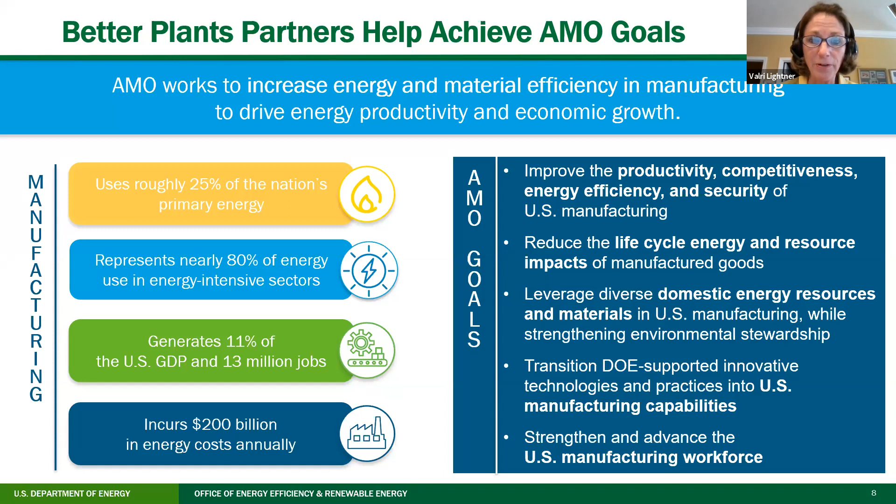In our next slides, I'm going to focus on some of the recent work we've been focused on in AMO and give you some examples of ways you can engage in partnerships with us. With COVID on everyone's mind, I thought I'd share examples of work the national labs are doing, taking advantage of partnerships they've developed with industry through programs like AMO, and using that relationship to assist industry in rapidly changing their manufacturing to make needed items. In this case, it's medical supplies that have been in short supply as COVID ramped up, particularly masks, ventilators, and consumables.

Taking advantage of capabilities at the Manufacturing Demonstration Facility, which focuses on additive manufacturing, Oak Ridge has used their metal manufacturing capability to make injection molding tooling for parts such as collection tubes for test kits. They've shared the designs for the injection molding tooling on an open source platform, particularly with companies they're already working with, but also wanted to make it available to any company with injection molding capabilities so they could help support making needed test kit supplies such as test tubes.

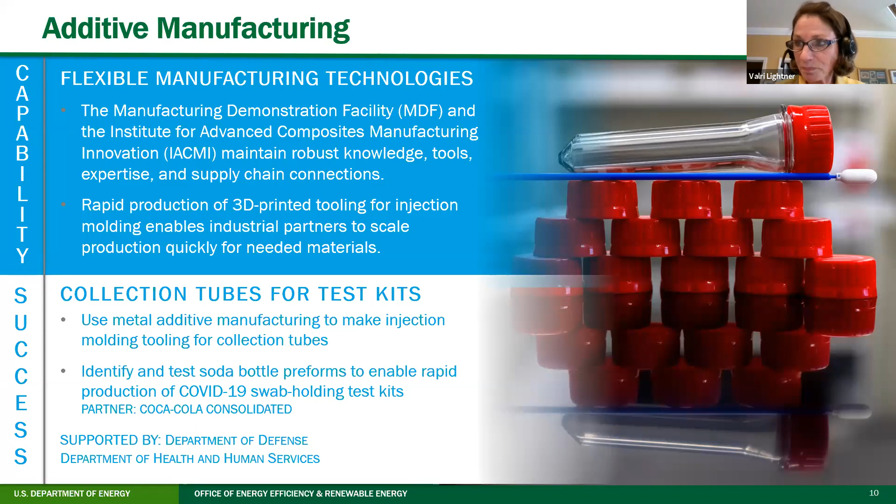Another example of work we're doing with industry for COVID relates to our Carbon Fiber Technology Facility. Here's an interesting story: the inventor of the N95 mask recently retired from the University of Tennessee, and he partnered with the CFTF to develop a melt-blown process to make N95 materials. First it's melt blown, and then there's an electrostatic charging process that occurs to make the material active in preventing transmission of the virus.

Oak Ridge has been working with him and partnered with Cummins to transition this technology to Cummins, who has melt blowing capabilities and can produce millions of pounds of the N95 material. Again, they're open sourcing the technology and looking to partner with other companies that also have melt blown capabilities that can make N95 materials.

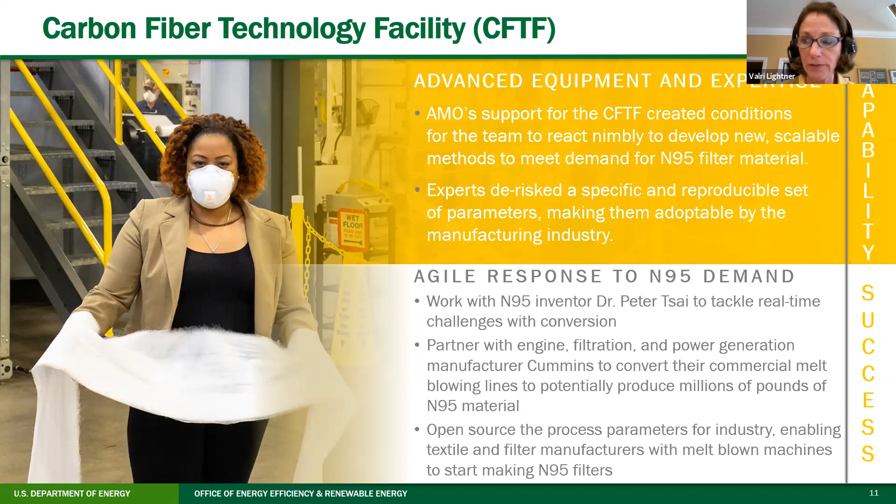In the past year or so, the Department of Energy has announced 3 grand challenges: one related to energy storage, one on plastics innovation, and one on water security. The Advanced Manufacturing Office is working in all these areas. In the energy storage area, there have been remote workshops like the one we're having now over the last month or two, gathering information from stakeholders to inform a draft roadmap that'll be issued later this summer. Along with the roadmap, there will also be a request for information, so for folks who weren't able to join the webinars, there's an opportunity to weigh in on where you feel the right federal role is for energy storage.

AMO has been partnering with the Vehicle Technologies program. Last year we had a topic in our funding opportunity to use battery manufacturing to help drive down the cost of battery energy storage materials and systems for vehicle applications. Just a couple weeks ago, we released a joint lab call with Vehicle Technologies, looking for industry to partner with the national labs through CRADAs to use national lab capabilities to help scale some of their energy storage systems. Look for additional information coming out about how you might partner with the national labs on that. Applications are due July 17th.

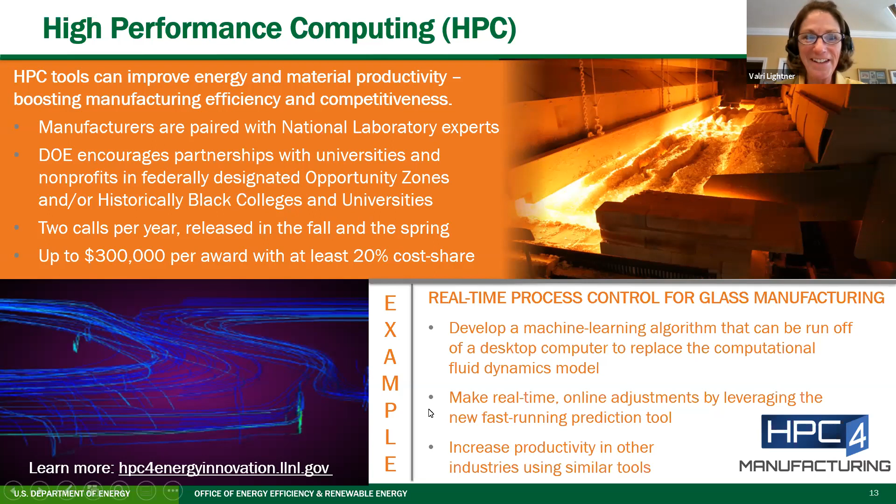So this is just one example of how industry has used that capability to optimize their process. Next slide. I just wanted to throw up a few of these examples to encourage you to continue to work with Eli and the team to explore some of these opportunities to expand your partnership with the Advanced Manufacturing Office.

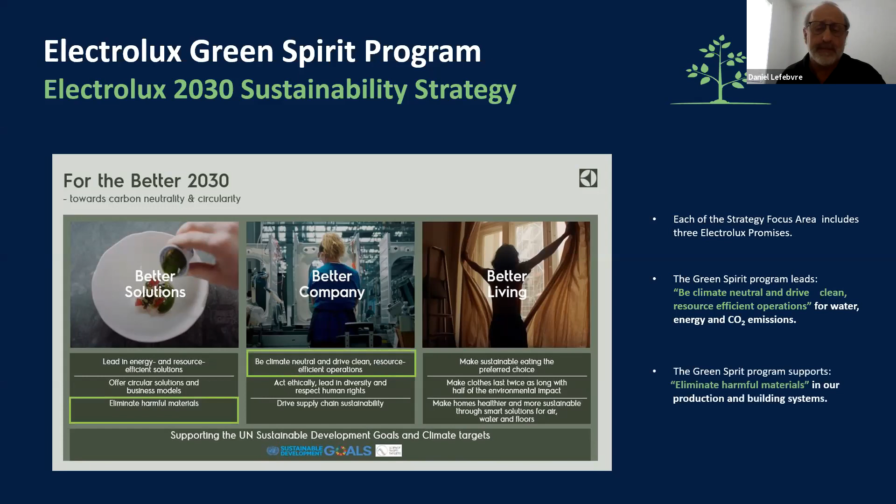I will let Mike, our manufacturing engineering director of our Kinston, North Carolina dishwasher facility, explain this water treatment solution. Thanks again to DOE. Again, my name is Mike Brown. I'm the manufacturing engineering manager for Electrolux Home Products, Kinston, North Carolina dishwasher facility.

Our project involved the implementation of sphagnum moss that took the place of the hazardous chemicals historically used in treating process water, such as cooling towers, chilling water loops, and quench tanks.

The specific species of sphagnum moss used in this system promotes the breakdown of scale and other contaminants, and it has special properties that enable this to happen. It gives us better results with better operating efficiencies. So it's better, and it's also a very environmentally favorable solution. If you look at the bottom left picture, you'll see the moss is provided or created in either bags or coupons.

One of the challenges the team worked on is providing sufficient contact time between the moss and the process water for it to do its work. We went through all the operations in the factory and are now 100% converted over to moss, and we have sustained it since 2017.

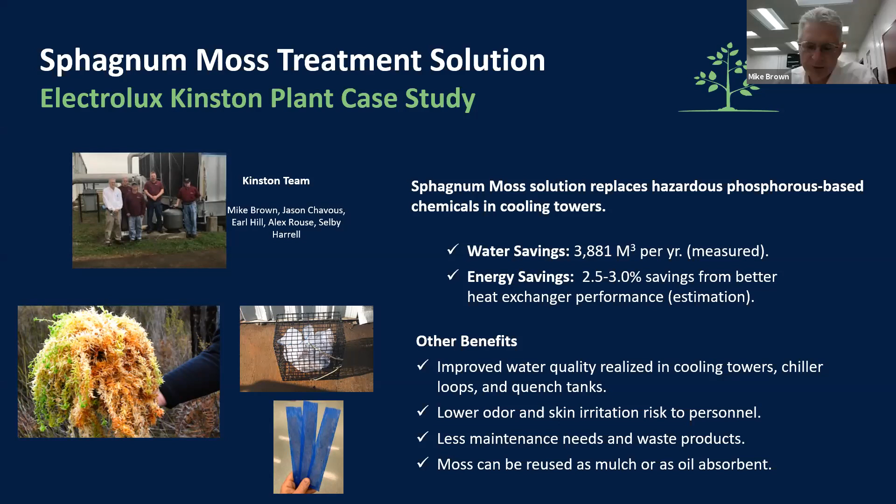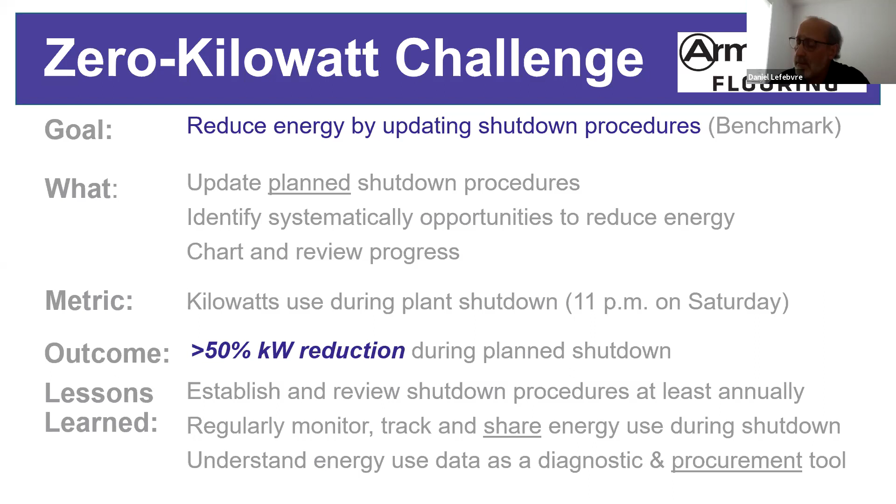So we started off with some really simple, easy changes to their shutdown procedures, things as simple as including in our shutdown procedures a map of where the light switches were located, so anybody new to the company would know how and where to turn off our lights. We progressed into adding sensors so that the lights would go on and off automatically, so that was not an issue.

But the real effort where we got one of the biggest impacts was really analyzing the equipment that was running in the plant during our planned shutdown procedures, and trying to determine how we could turn off the pieces of equipment that were running on the weekends and during the planned shutdown.

For example, we had our compressors. We were running our compressors at our Lancaster, Pennsylvania plant, which is the plant we started our challenge with. We were running them over the weekends because we had to maintain the fire suppression system. But what we realized is we didn't need to run both compressors to maintain the fire suppression system, so we were able to bring down one compressor and still run the fire suppression system with the other.

Our maintenance manager was able to look at how much energy we were using at the plant. We used our demand management system, so it's real-time data. He could go in, turn off equipment, look at our demand management online system, and see how that was impacting our energy. That really led to our key performance metric: kilowatts used during plant shutdown.

So we basically looked at how many kilowatts we were using at 11 p.m. on a Saturday when the plant was shut down. We did this before we started studying and making changes to our shutdown procedures, and then we did this again after we made changes.

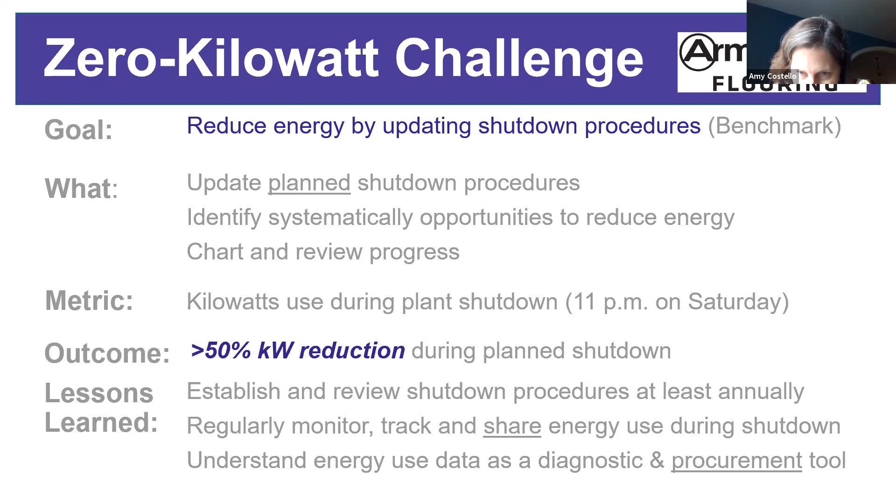Next, I'd like to present Ford Motor Company's Jeff White, who is the Energy Manager for Global Utility Supply and Efficiency. Ford Motor won a Better Project Award for redesigning their plant and including CHP in the new plant's redesign. There's also a lot of other innovative things, and I'll let Jeff go ahead and tell us all about it. Go ahead, Jeff. Thank you to the DOE team for hosting this conference and inviting me to speak on Ford's behalf about this new central energy plant.

The who, what, when, where, why, and how of this project is a remarkable story of vision, collaboration, and cooperation to deliver a state-of-the-art energy center that will function as the heartbeat of Ford's research and engineering center in Dearborn, Michigan.

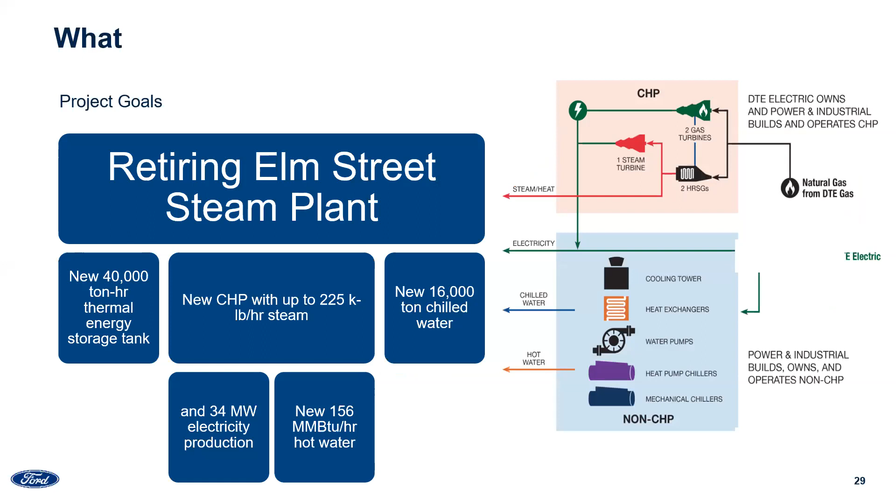For those of you who don't know, the Ford campus is in Michigan. All of the necessary utilities to heat, cool, and power the new campus were considered in the development of this project. We said goodbye to the old Albert Kahn designed steam plant to welcome the addition of a new modern central plant.

The project began in 2016 and concluded with the certificate of occupancy and commencement of commercial operations on December 31st of 2019.

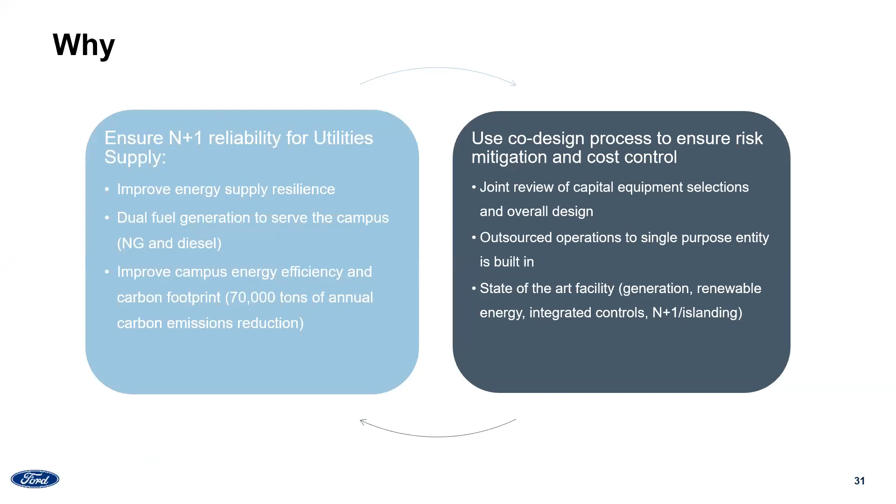N+1 utility resilience and environmental impact of this facility were 2 of the key design requirements that drove a recursive co-design process intended to ensure risk mitigation and cost controls. There were many questions as to how this project would come together, and this slide represents a sample of how those questions drove the thought process, the selection of partners, and the ultimate design as an ahead-of-the-meter facility.

The contractual relationships that were developed between private, regulated, and non-regulated entities is unique and serves as a model for how this country can solve regional and local utility infrastructure needs and improvements.

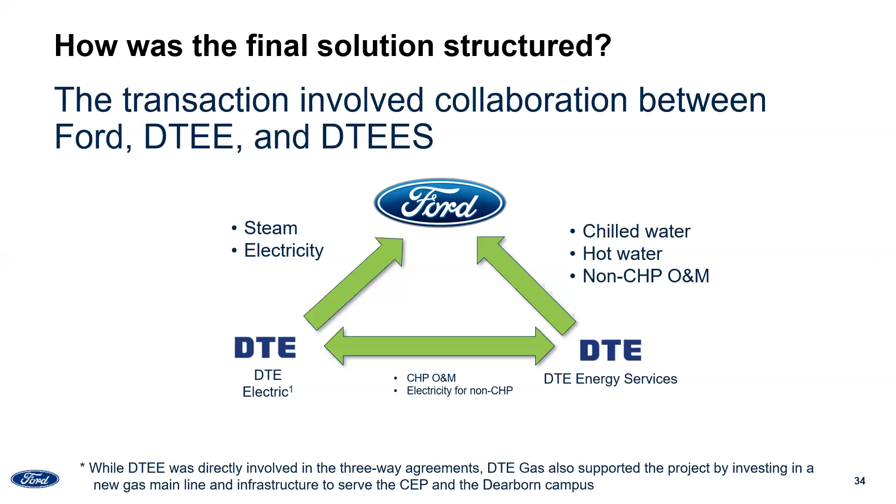For example, the regulated utility owns the gas turbines and heat recovery boilers. The output of those assets are sold to Ford at tariff rates. The balance of plant and the building itself are owned and operated by the unregulated affiliate. The output of those assets are owned by Ford, and the ownership of the assets themselves transfer to Ford at the end of term.

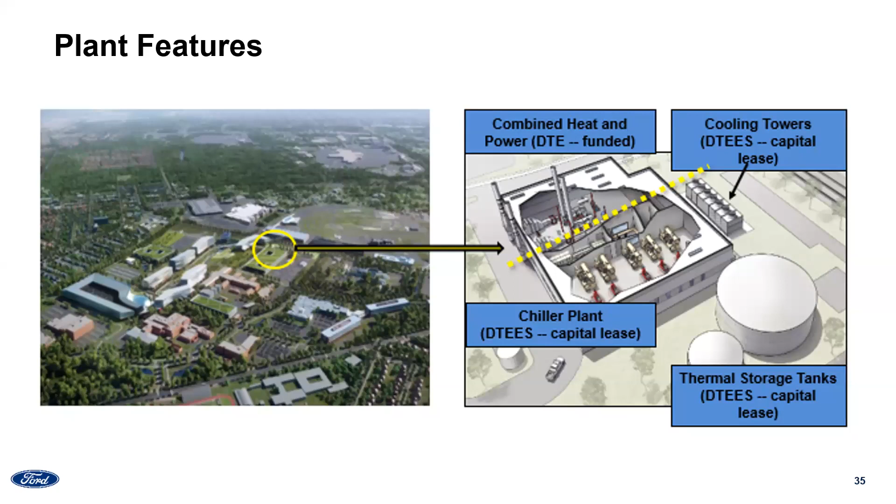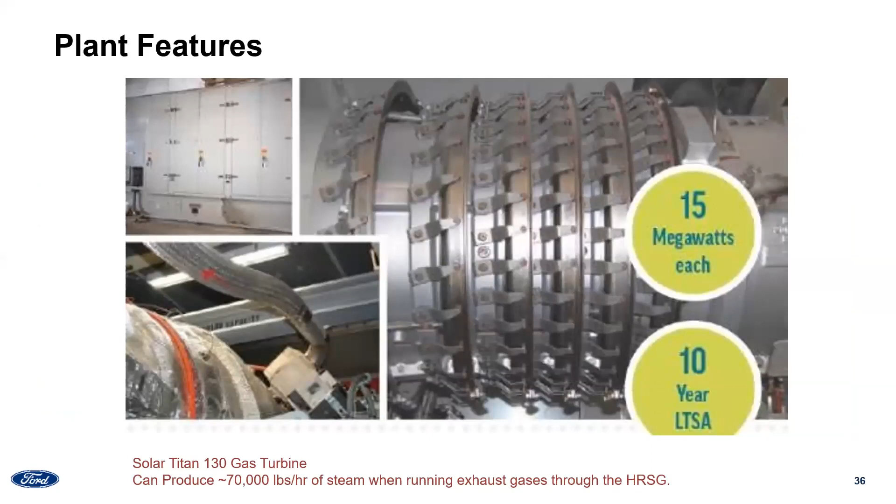I've included some pictures of key systems, but six minutes is woefully inadequate to cover the amazing team effort that went into the design, construction, and commissioning of this facility. While scrolling through the remaining pictures, I will talk about the digital twin aspects of this project.

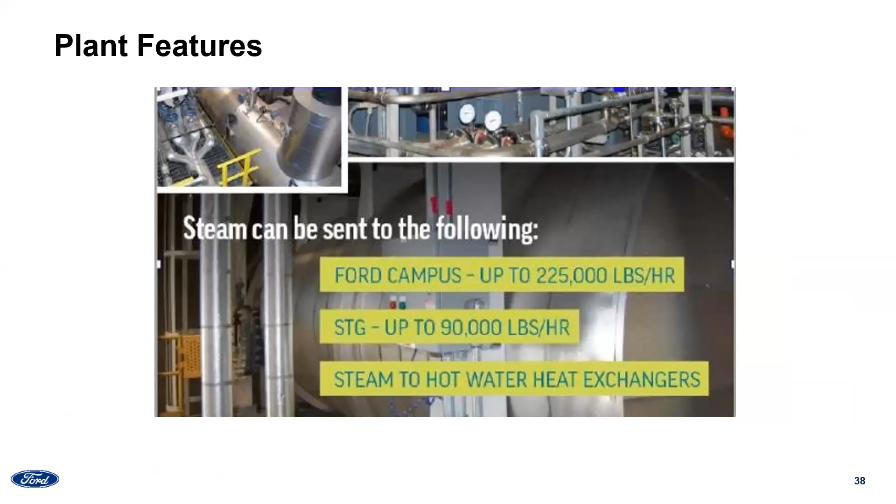The entire project was developed as a 3D model. The model dictated where every pipe hanger, every fire suppression head, every conduit, cable tray, and pipe should be located in 3D space.

Technology was used to mark precisely where each and every pipe hanger should be located. Each one was installed before any pipe was delivered to the site.

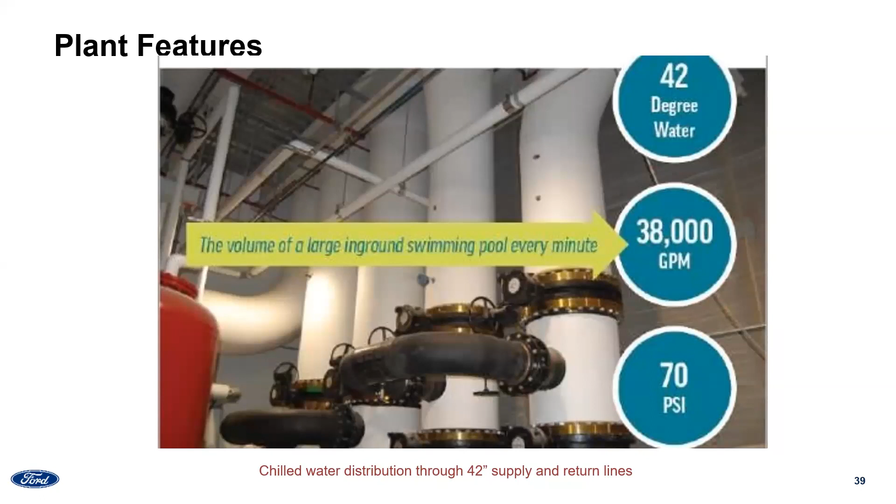The pipes were numbered and lifted into place, and then technology was used to validate the actual installation and ensure alignment with the 3D model.

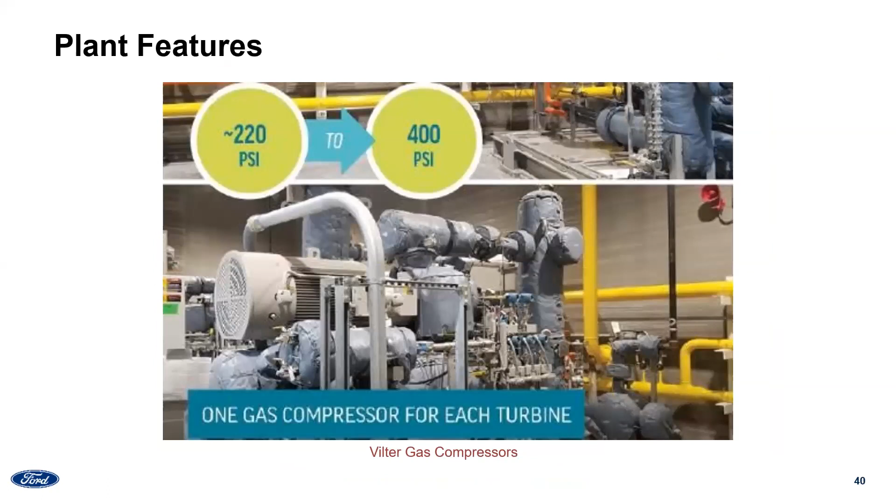Systems such as the thermal storage tank were used to model stratification design for the chilled water supply and return to the campus.

Pipe fitters had several on-site computer displays to reference the 3D model as needed.

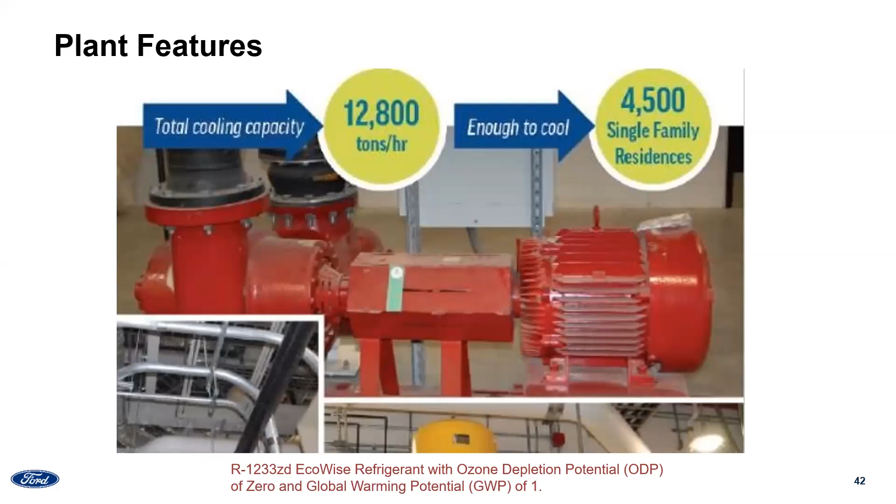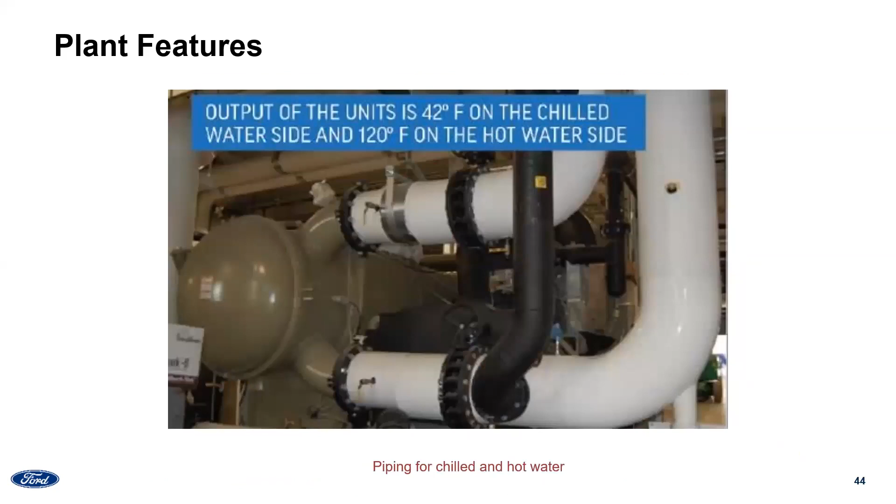The 3D model was then further enhanced into a digital twin that contained specifications and operating parameters on over 3,500 distinct operating assets.

Handheld devices and augmented reality capabilities will leverage the 3D functional capability of the digital twin to validate operations and establish preventative maintenance requirements.

There are many unique design features of this facility, including the ability to incorporate future planned geothermal capacity. Everything from a central plant perspective is integrated to include up to 3,000 tons.

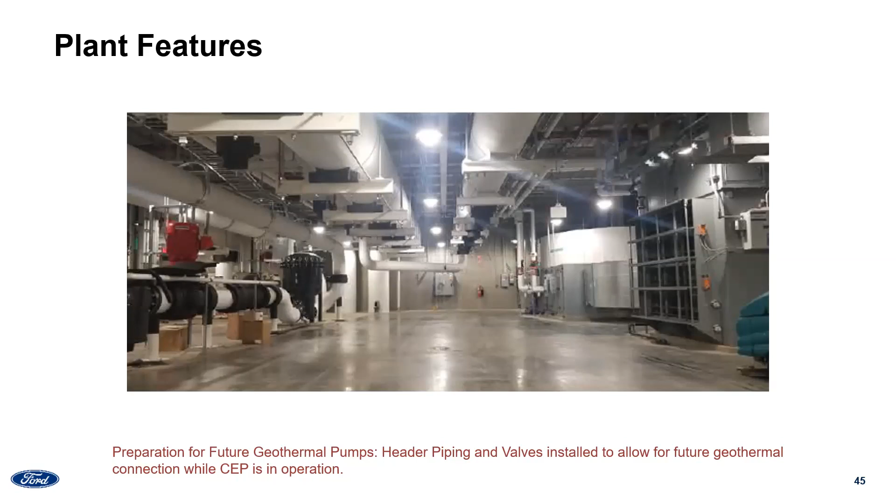Next slide. And next slide. And next slide.

Overall, this was a stellar project that I was privileged to be involved with. The vision and goals set back in 2016 were achieved due to amazing efforts of so many people working together to turn an idea into an unbelievable end product.

I could use my entire allotted time saying thanks to those people. Likewise, there are many innovative aspects of this project left untouched with this presentation, and I'm sure those discussions will come at some future date. Thank you for your time.

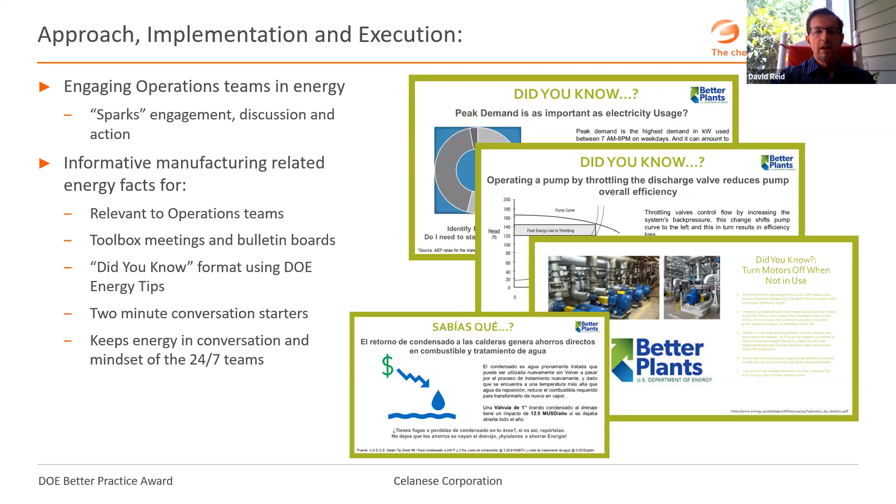The Energy Sparks can be shared at shift toolbox meetings at the beginning of shifts, or displayed on bulletin boards, including electronic bulletin boards, across the plants. Our shift supervisors at Celanese are always looking for topics to cover with their teams to generate engagement, and Energy Sparks give them that tool to get their team thinking and motivated about saving energy.

The Sparks are really only a part of an overall energy management strategy, and they contribute indirectly to energy reduction by driving engagement to make that difference. But that difference is, in the end, what results in improved energy efficiency, use, and cost.

One example of how Energy Sparks made that difference: at one of our plants, an Energy Spark on steam traps was shared with the operations shift team. It talked about how to detect a failed trap, and was shared with shift operators at toolbox meetings. The site already had a maintenance program in place, with annual inspections of steam traps done by an external company.

But the operators, following up on what they learned, suggested doing some further checks. Only two weeks after the external steam trap inspections were done, an operator doing his own checks found a critical broken steam trap and was able to get it repaired almost immediately, saving about $7,000. That may not seem like a lot of money, but these small improvements add up, and most importantly, they engage the operators with a result they feel they contributed to.

So this is only one example of how Energy Sparks initiated conversation and action at the shift team level.

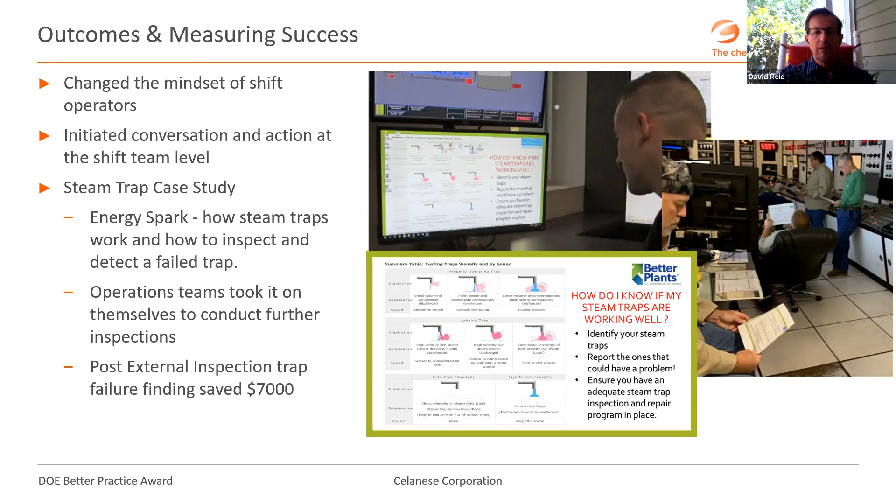Currently we have 16 Energy Sparks available in English and Spanish. Our goal is to do two things: translate them into other languages to ensure we connect with teams across Celanese's footprint, and continue to expand the number with new topics relevant to our operations teams.

A couple of important things: Energy Sparks can be adapted to any subject in the sustainability space, including water and waste, as well as any kind of safety and environmental subject.

I think this is really important as employees become more engaged in energy reduction at work, this mindset carries over to their home and community life as well. And this tool can be easily adapted to any company trying to engage employees in energy and sustainability efforts.

Companies can develop sparks that are relevant and specific to their business, ensuring that meaningful topics are covered that connect with their teams. So again, thank you to the Better Plants program for the recognition, and thank you everyone on the call for your attention.

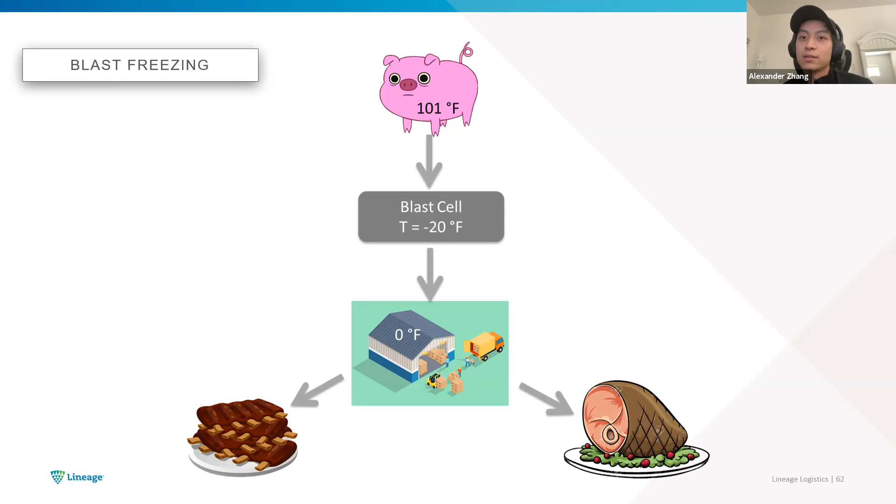So real quick, what is blast freezing? Usually we just store frozen food where the food is already frozen and people give it to us, and we keep it there for a duration before sending it off to the end user. But in the blast freezing process, we take food that is still at ambient temperatures, like freshly produced meat packed product, and we rapidly chill it in a room we call a blast cell, which is at -20 or lower Fahrenheit. We cool it as quickly as possible to maintain food integrity, quality, and safety, so it can go into our freezer before we ship it out to end users, supermarkets, restaurants, etc.

So we have to put them into what we call a blast freezer, which is a room using the refrigeration system we have, that blows out really cold air from evaporators - again, -20 Fahrenheit or lower - and cycles it through this racking space where we'll put all the different products. In this case, it would be all these strawberry drums, like the example before.

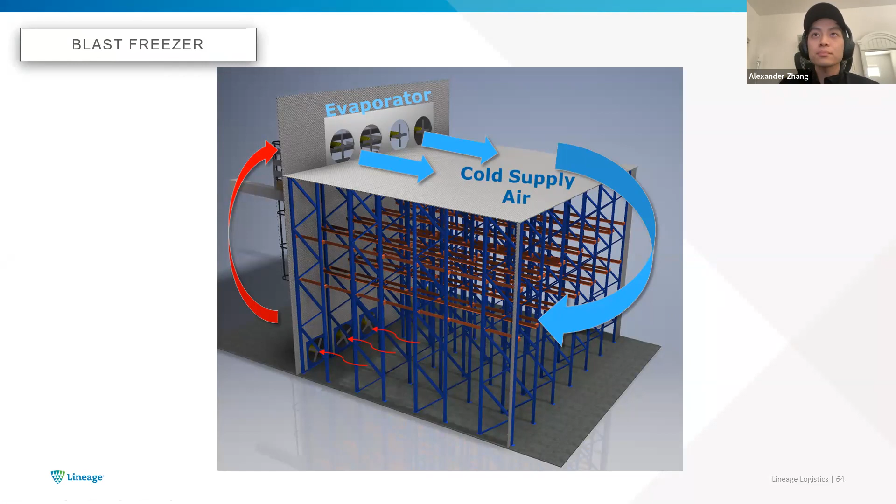So what makes a good blast cell? There's two main components. First, you need the blast cell to be cold enough, so the temperature and refrigeration capacity needs to be appropriate. Second, you need good airflow. I think the best analogy here is it's kind of like a water hose - you need enough water pressure and you need good distribution so you can water effectively.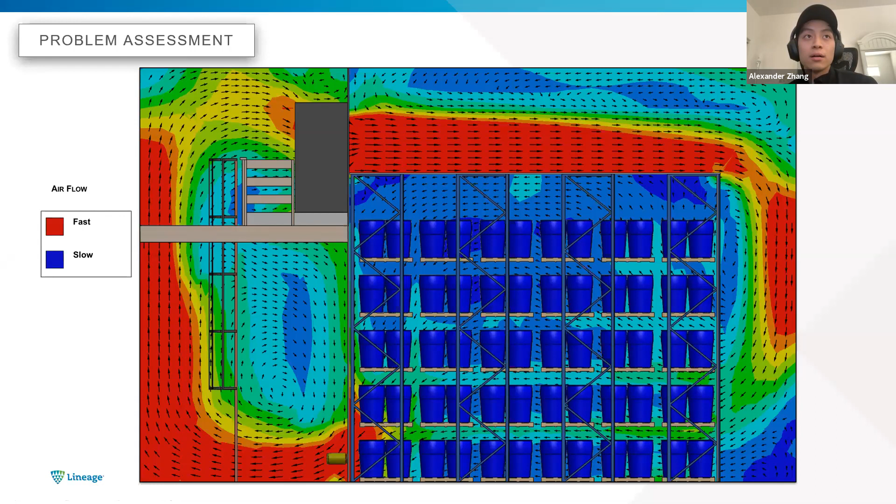So we took a FLIR imager as well to see if the real world results would match our simulation results. And we got what we kind of expected, where there's a differential gradient in the freeze rate of the pallets when we load one load. And that's not good because each of these pallet loads are loaded in one batch, so we have to freeze and remove everything at the same time.

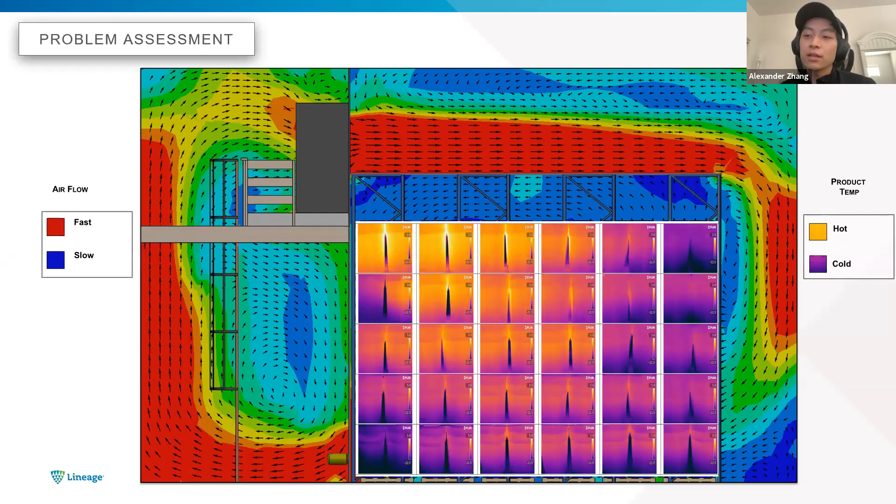So we basically ran an R&D project where we tunnelized the design. The easiest way to control airflow is just to blow through a tunnel, point A to point B. So we modularized these tunnels. We put louvers on the back to control the airspeed, and that was the idea behind this design.

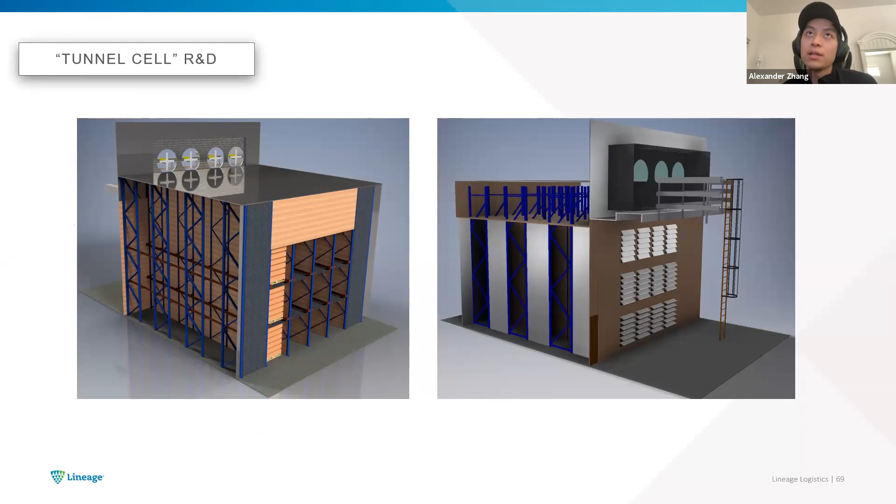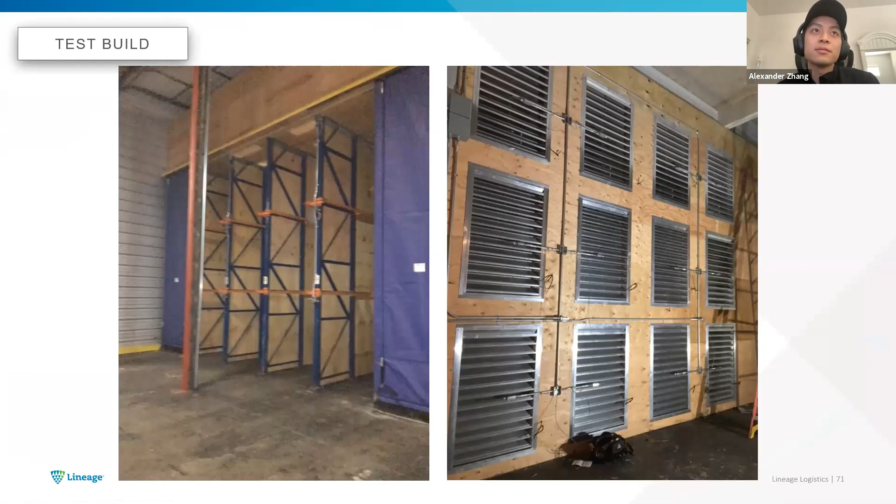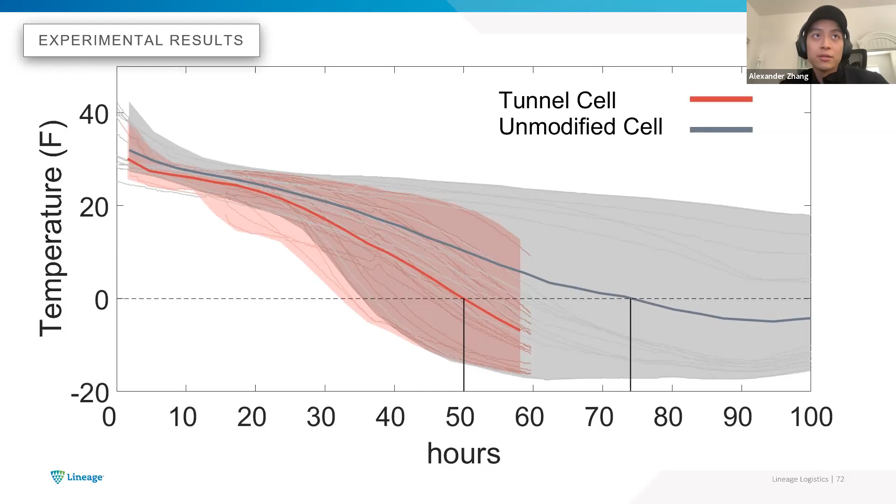And we tested it out using temperature sensors where we put in each of the pallets to get the freeze curves. So these are the results. We managed to cut down the average freeze time from 75 hours to 50 hours. So it's a good result.

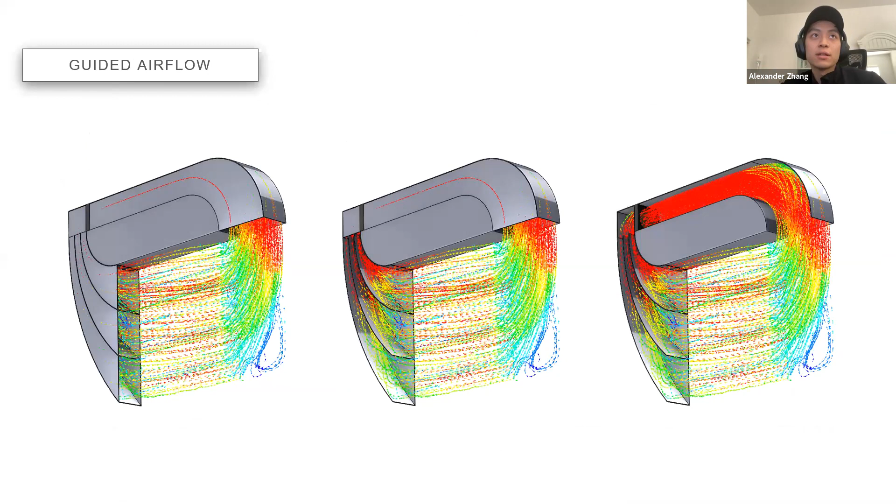And we tried to make this modularized as well.

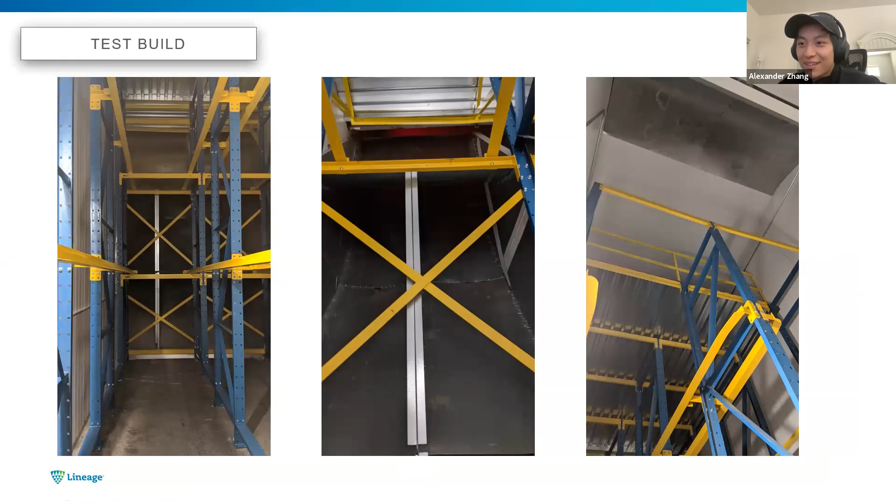So we built it in real life. And then you can see it here as well. I LiDAR scanned it, so it looks pretty much as you would expect.

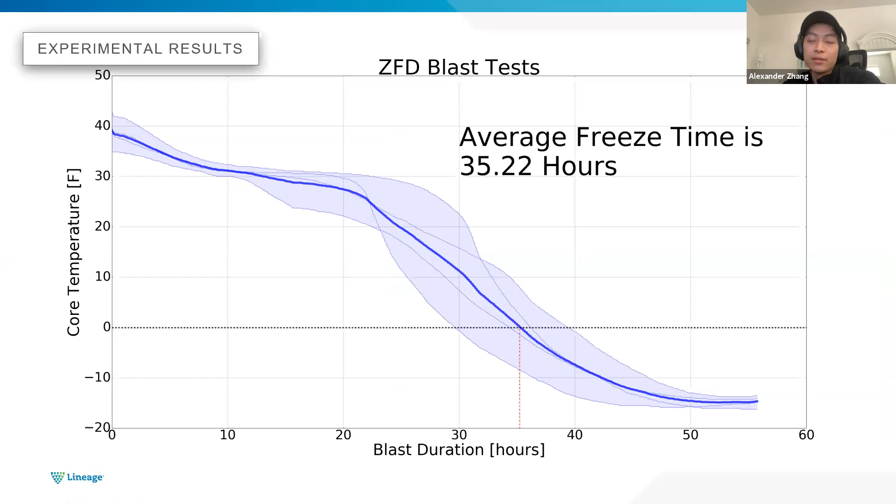I just want to dive into the results here where we cut down the freeze time to 35 hours from a 72-hour freeze at this facility. And if you look at the projections, we are basically able to double the throughput with a 20% energy efficiency increase.

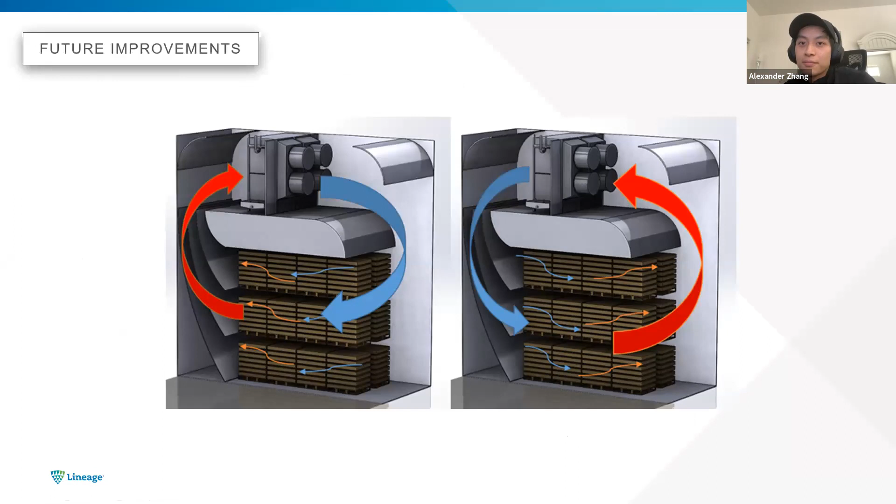So we're still working on new changes. We want to work on bidirectional airflow and things like that, so it's still a work in progress. And then the last two slides is we patented this design and we're still working on future improvements.

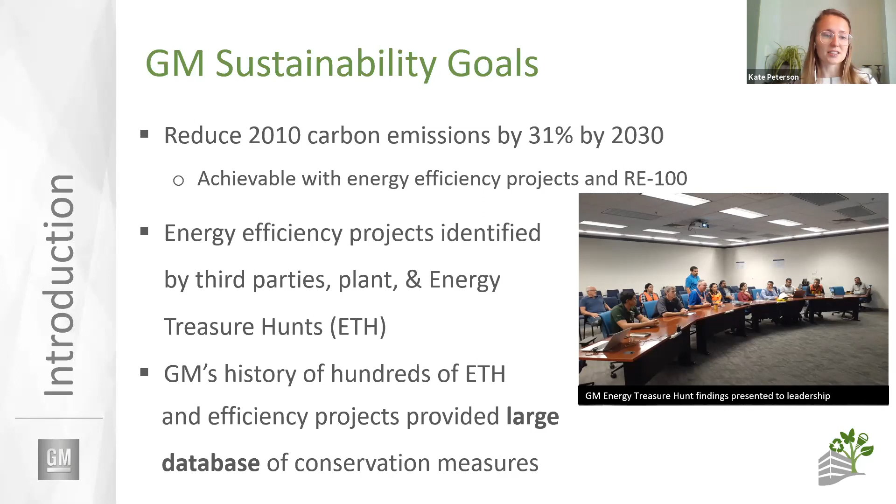The only downside to that is we've really never thought to try to share all of the plant projects with each of the plants. So pursued projects were generally tracked as a part of the plant's energy performance measures. However, suggested projects, like ideas from the energy treasure hunts, really just kind of remained in the energy treasure hunt folder for that particular plant. So in general, it was kind of kept out of sight, out of mind for a while.

And then any completed projects were not really compiled for other plants to view. Instead, project information was generally delivered through the grapevine, if one plant manager knew another plant manager, for example.

So we realized we needed a tool that would track both past and current plant projects. And we wanted this tool to be live so that it would update with the most current plant project information. We also wanted this plant project information to be available to all plants, sharing both past projects that were created maybe back in 2016, all the way up through the current projects that plants are working on today, with all of the GM facilities.

And we wanted this information to include the granular details, like the cost to implement, the energy savings that they expect, and the energy savings that they actually found, et cetera. And we wanted this tool to be really easy to use. We knew that if it had some sort of interface that was a challenge for plant managers to learn, they probably wouldn't use it. So we kind of stuck to the Excel format to really showcase this tool.

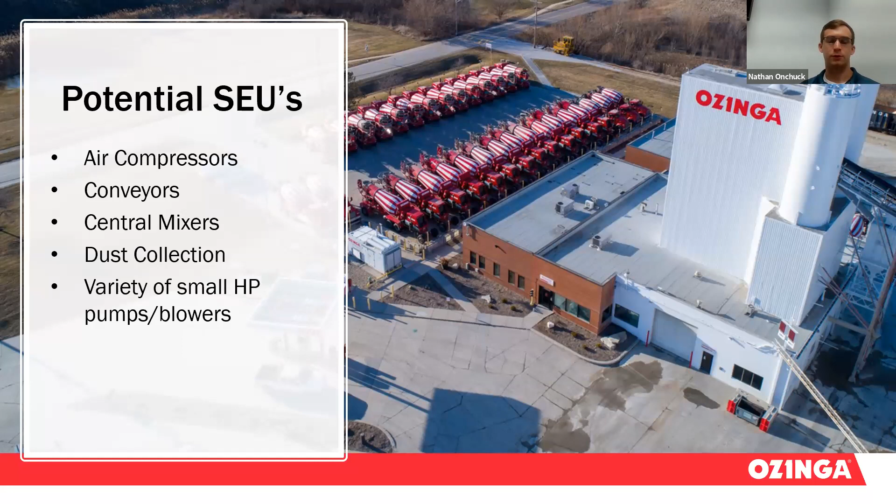And if we go to the next slide, we ended up coming up with the equipment loan program, partially because I have friends in IT, so we had initially started looking at what it would take to connect everything and get real-time data for every piece of equipment in the plant. And we kind of quickly found out that that would cost more than we spend in energy, so it wasn't going to be possible to recover those costs.

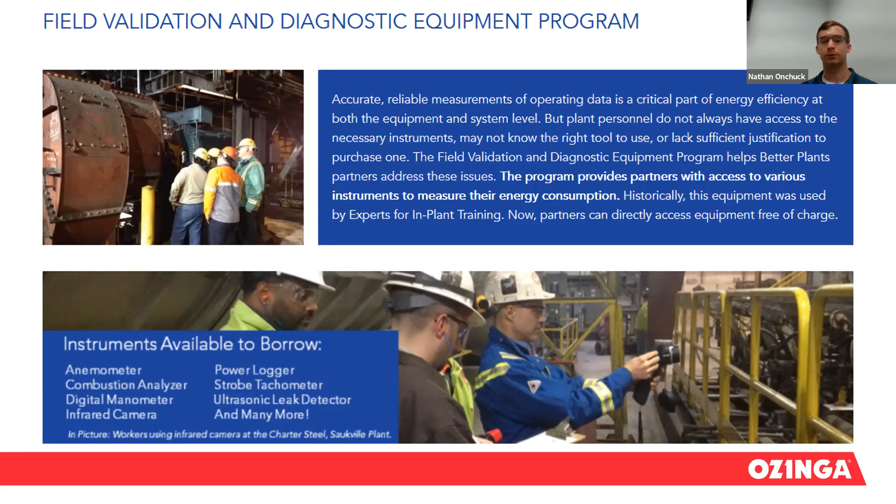So we started small and worked with both our TAM, Christina, and Daryl, who helps run the DOE's equipment loan program, to just try out different data loggers. And we found that using just CT clamps and pressure transducers, we were able to get a surprising amount of information off of our plant equipment.

One of the first projects we had done was just monitoring one of our rotary screw air compressors. The compressor was set up initially to maintain just a 10 PSI pressure band, and it would run in a load-idle cycle, so the motor was turning the entire time the plant was open. We were able to make these charts showing whether the motor was loaded, idling, or shut down completely. You can see the first chart shows the compressor was running all day long.

When we really dug into the compressor manual, we found it actually had some different operating mode settings. One of them was called vario mode, where the compressor would track its own motor starts and motor temperatures to decide whether or not it could idle or just shut down completely. And in order to give it more time to be shut off between loads—our plants are very batch focused, we're either loading a truck and using air, or we're waiting for the next truck and not using any—we reduced the lower pressure set point by 15 PSI to give the compressor 25 pounds of storage between cycles, and then put it into this vario mode.

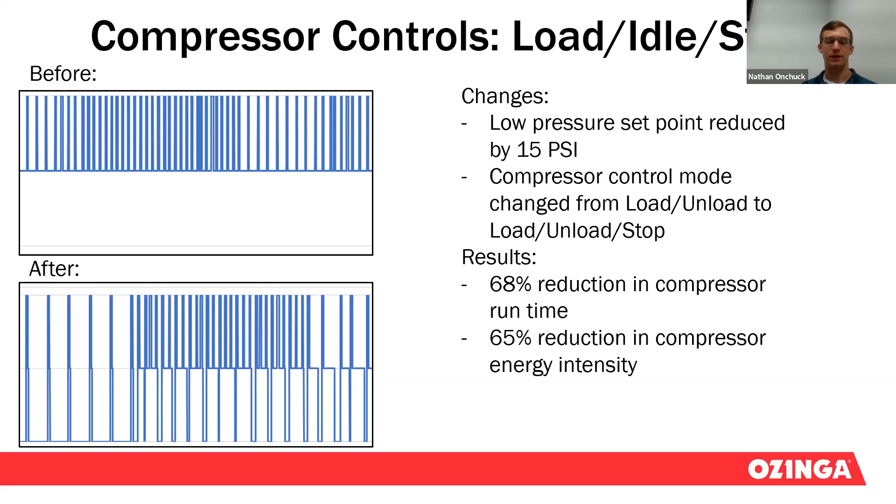And what we saw was a 68% reduction in the compressor's runtime throughout the day, and a 65% reduction in the compressor's energy intensity.

So we actually found that this compressor was undersized for the plant when we were really busy. It'll be moving to a new plant that's smaller, has lower air demand, and it'll be getting replaced by 2 smaller machines that we were able to size based off of this data.

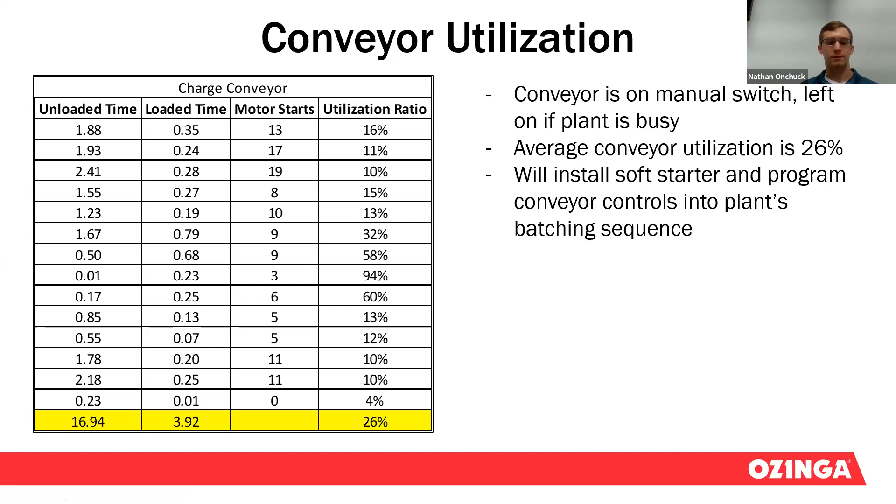And the next slide. So that knocks out 2 of our biggest energy users. Our hope is with this data, we're going to be able to prove out these projects and build a repeatable project that we can take to all the other locations, and hopefully start to really scale some of these different energy savings projects. And that is all I have. So thank you guys.

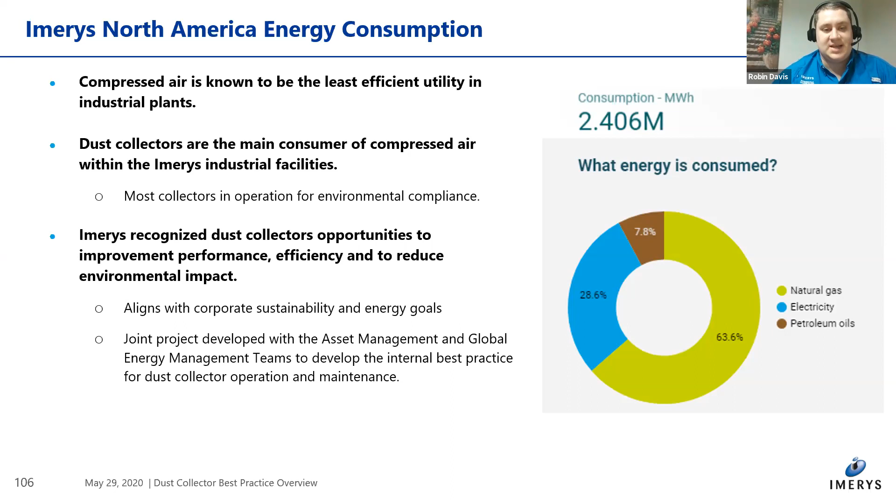Next slide, please. So looking at just North America, we have 40 plants in North America. Within these plants, there's over 500 dust collectors. Again, most of them had different kind of ways of handling this. So what we did was we reached out and took all the leaders from those plants and said, what are you doing with your dust collectors? How are you managing them?

Most had some initiatives ongoing that we were able to bring in. Some said, we just make sure they're in operation and we forget about them. So we kind of rolled all this up and put it into one package of what's everybody's doing and what's the best way forward for the company.

This is going to be the reference that everybody goes to when they say, I need to work on a dust collector or make improvements in my dust collection system. It's fully encompassing from the very beginning through the end of the process with a dust collector. We covered recommendations for EHS, energy, production, and maintenance, the whole gamut that would affect the company. We released this document on March 18th.

So it's just now getting rolled out. I'll talk about a few of the initiatives we already had ongoing that went into this best practice. But now everybody's a part of it, and we're starting to roll this out on a lot of the other sites. We've gotten good feedback too—a lot of sites have already taken it and run with it, saying they've been needing something like this and want to implement it as fast as possible.

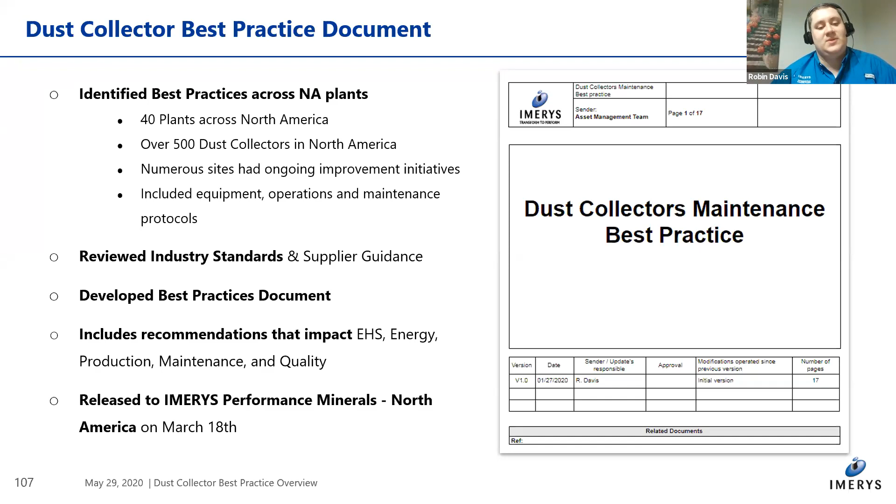So, some of the things we included in this best practice: one of the first was lowering the plant air pressure. A lot of our plants over the years assumed if 80 PSI is good, 90 is better, and 100 is even better than that. We realized we were over-generating compressed air for no reason other than assuming it was better. Some of our facilities have been able to reduce overall plant header pressure, which gives us a very easy, quick win on the energy aspect.

We also found new technologies, particularly with pulse valves. The ones we've started using are from a company called MAC pulse valves—it's a new way of handling this. The old system used an old rubber diaphragm that had been around since the 1960s. It does work, but technology has come a long way, so using these new technologies is helping us reduce the compressed air used at our dust collectors.

Water filtration or water separation before the dust collector is another area. You can imagine fine dirt dust and water don't mix very well, so we want to make sure we get all that water out before it reaches our dust collectors. We've come across a couple companies, Tsunami being one we're looking at, but there are multiple out there.

Along the lines of EHS, and how to not only save energy but get buy-in and apply it across the board, we started looking at things like differential pressure on these dust collectors. This has been a big help—environmental groups and EHS have loved it because it helps them monitor compliance with permitting as well as troubleshooting when we have issues and need to go back and look. So it's been a big help within the plant, simply through automation and sensors.

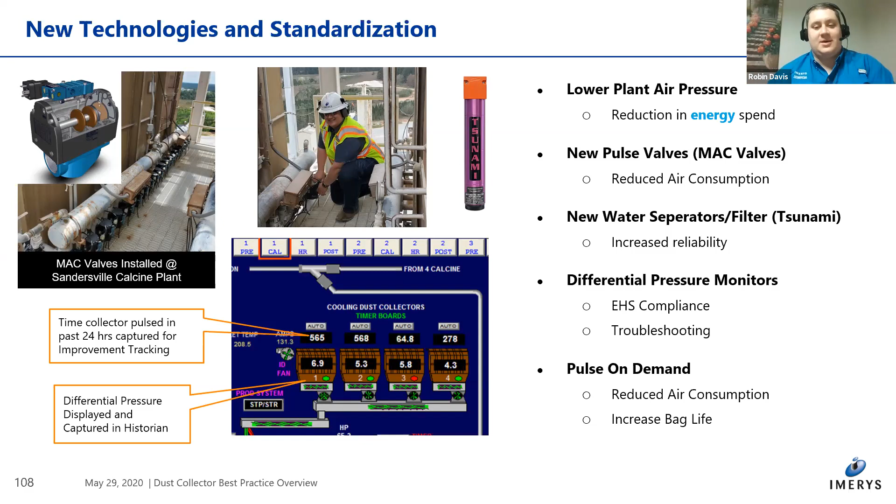So we implemented the pulse-on-demand system. Next slide, and I'll just hit the highlights.

I have an overview here of the Sandersville calcine plant. We've covered a lot of the new technologies, but essentially what we've seen is the potential of 14 gigawatts possibly reduced, as well as 6,700 metric tons of CO2. So it's a big impact for Imerys North America, and on top of that, we're rolling it out worldwide. Thank you.

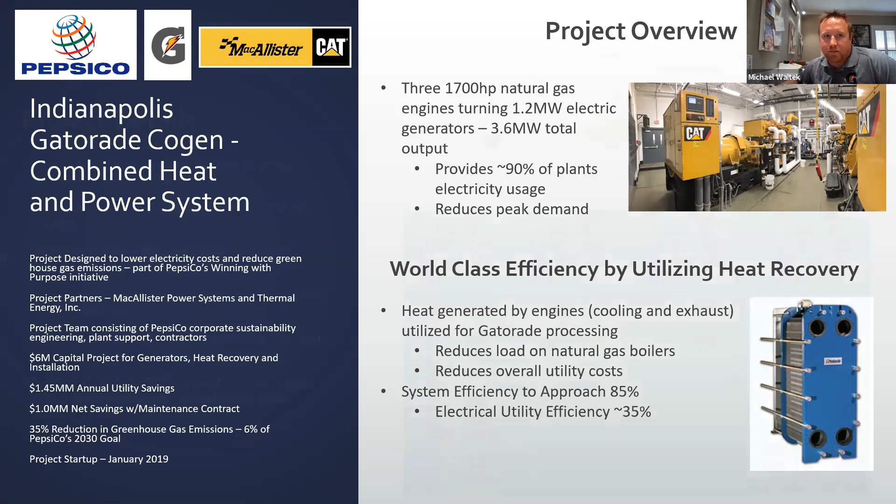Next slide, please, to get into some of the details. The generators utilize a pretty sophisticated control system to produce electricity only based on the plant load. Our generators are not intended to backfeed the grid; that wasn't part of our project based on financials. So the generators are designed to analyze our plant load and only run to produce enough electricity to satisfy that load. They can run down to about 50% loaded, so basically they run from 600 kW to 1200 kW each.

Now to get into the heat recovery. Gatorade is a thermally processed product, so it provides a very large heat sink to utilize for engine cooling. The majority of the energy required to cool the engines is provided by transferring heat to our Gatorade product across multiple production lines. We can raise the temperature of our product by nearly 40 degrees on some of our lines, depending on the flow rate, which is really good for more or less free energy use for cooling.

Not only in the cooling of the engines, but we also use the exhaust created by the three engines to make steam. So the 700-degree exhaust is used to make steam with a natural gas boiler that we converted for additional heat needed for processing. You can see some of the graphics there that show how our heat recovery system works and how the generators are controlled. Next slide, please.

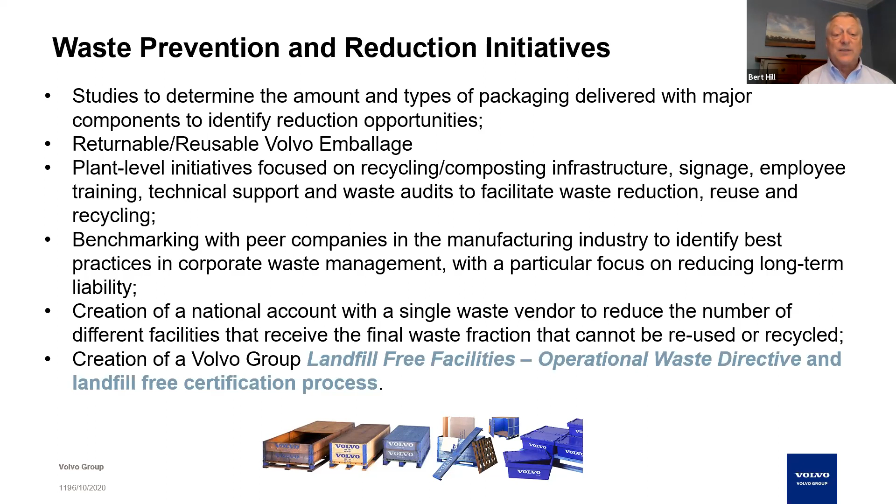The certification process comprises 4 elements. First, we want to see that a site has documented and mapped all of their different types of waste, because that's where you start—you need to know what you have, how much, before you can map out what to do with it. Then we want to see a program covering this big portion of the waste hierarchy of reduction, reuse, and recycle, and that it's been in place for at least 12 months, so we look at records going back 12 months. We also want to make sure not more than 1% is going to landfill.

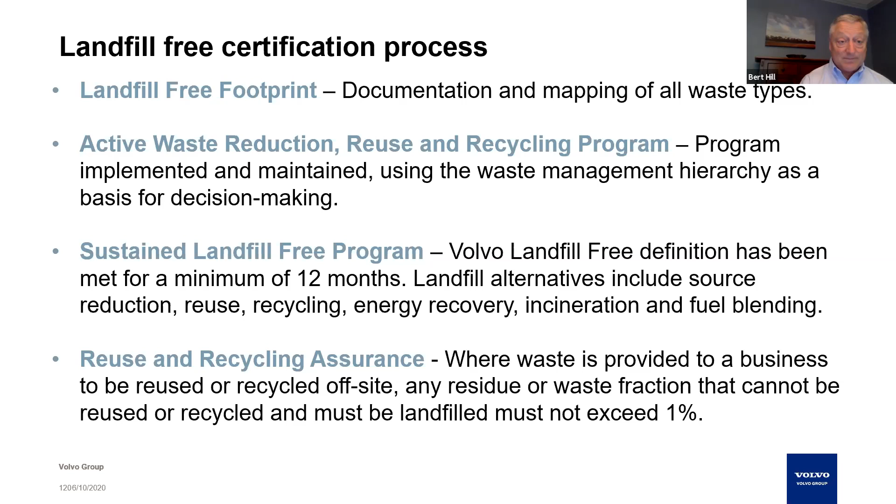Next slide, please. To date, we've had 4 manufacturing plants achieve the certification: our Volvo truck plant in New River Valley, remanufacturing in Middletown, Pennsylvania, our Mack truck plant in Lehigh Valley, Pennsylvania, and our Volvo construction equipment plant in Shippensburg. We have 3 more online going through this 12-month evaluation period.

As a result of these initiatives, last year only 6% of the waste from our facilities was landfilled, and 78% of our waste from operations was recycled. I'd also like to quickly name a couple of our businesses that complete this loop in the circular economy.

Our remanufacturing operations take engines and other powertrain components and remanufacture those to original specifications—I've seen serial numbers on engine blocks that go back decades. Rather than using new raw materials, energy, and chemicals, we try to remanufacture these parts so they get several lives. Our Dex heavy duty parts business takes in complete vehicles and completely disassembles those, selling parts like hoods, entire cabs, wheels, seats—you name it—on the aftermarket.

So those don't have... Thanks, Bert.

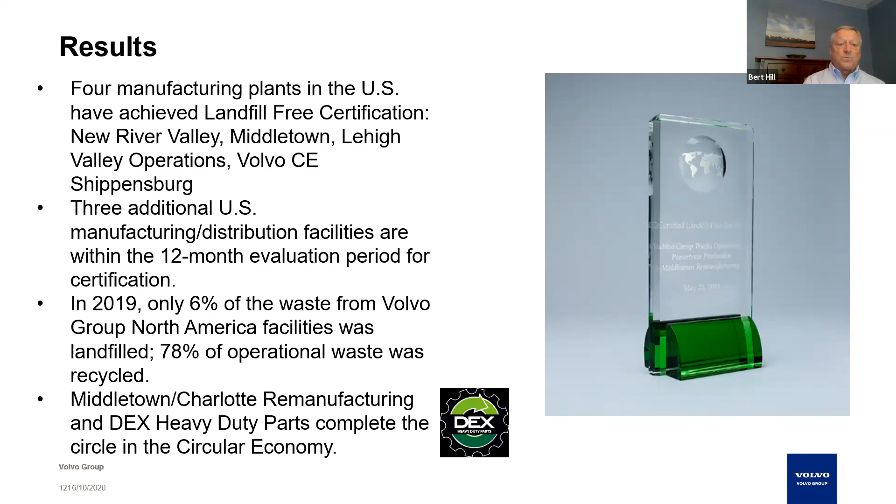All right, let's go to the next slide. First, I want to thank the DOE for the honor to be here to speak to you guys and represent ThyssenKrupp Elevator on this project. Next slide. I want to tell you a little bit about ThyssenKrupp Elevator.

We're located in Middleton, Tennessee. It's the only plant ThyssenKrupp has in the United States. We're a worldwide leader in elevator manufacturing.

Our factory was established in 1969. We have about 700,000 square feet of manufacturing space, with the rest being office space. We employ about 1,100 dedicated, hardworking employees here. We create an elevator from start to finish inside our four walls.

Our sister company, Energy Management, is very important to us, and that's kind of how we got started with this. Some of the accreditations we received: in 2019 we received ISO 50001 certification. In 2015 we became LEED Gold certified. We're also ISO 9001 and 14001 certified.

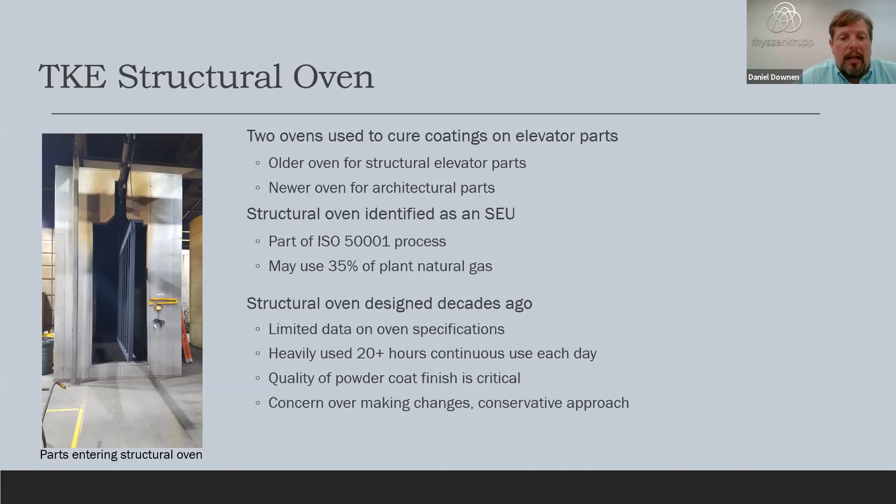In 2018, we had an IAC audit done, basically an energy treasure hunt. University of Memphis sent graduate engineering students down here, and we put data loggers all over the facility, got measurements of our ovens, and came up with the idea of installing insulation in our ovens. Our oven is multiple decades old, so there wasn't a whole lot of data on it, but we knew by shooting it with temperature guns that there was a lot of heat loss as a result.

We decided to add about 6 inches of insulation to the tops of our oven. We used data loggers, as I said earlier, and we also did an IAC. We showed some great things there, but we also had our TAM rep come in 2019 and do another treasure hunt. With his help, we were able to get baseline numbers using the DOE MEASUR tool, and we constructed a model to see what our heat loss was.

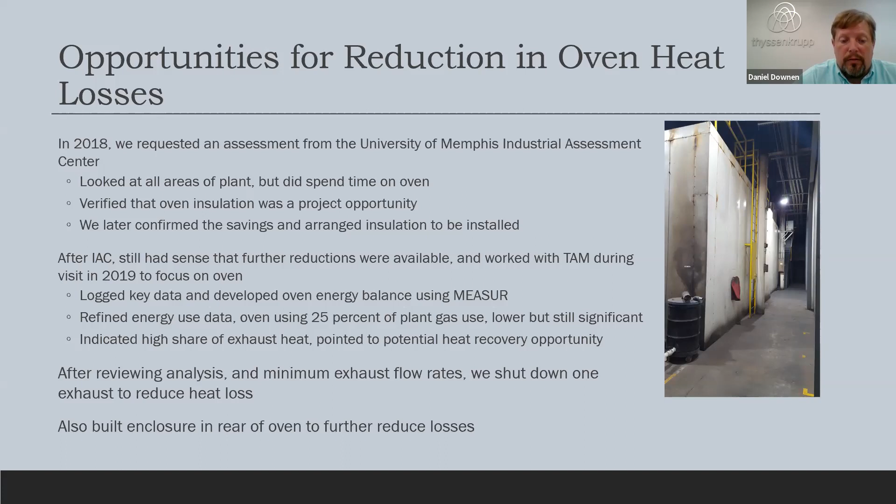I'm going to turn it over to John Keller, our manufacturing engineer. As Daniel mentioned, we recognized our oven was a significant user, so the journey had to start with a beginning point.

We gathered data and used a MEASUR tool to build our energy balance model, and used this data to identify what to do. The low-hanging fruit for us was oven insulation. We used a tool called Rock Assist, made by Rockwool, to input the skin temperature, heat loss, ambient temperature, and airflow to help calculate the maximum thickness, or the most payback. It calculated 6 inches was optimal, but we used 3 inches because it allowed us to overlap our joints with two separate layers, which sealed a little better.

Throughout this, we used the energy balance model with the MEASUR tool to confirm our savings. The data also showed we had an excess of exhaust leaving the oven. We had 2 exhaust stacks running during the purge cycle, though it was designed for one to cut off after the purge. We found that sometime in the two decades it had been in operation, that had been disabled, and both exhausts ran the whole time. So we worked through the code requirements and disabled one after purge, still meeting code and required air changes, but not putting excess heat straight out to the atmosphere.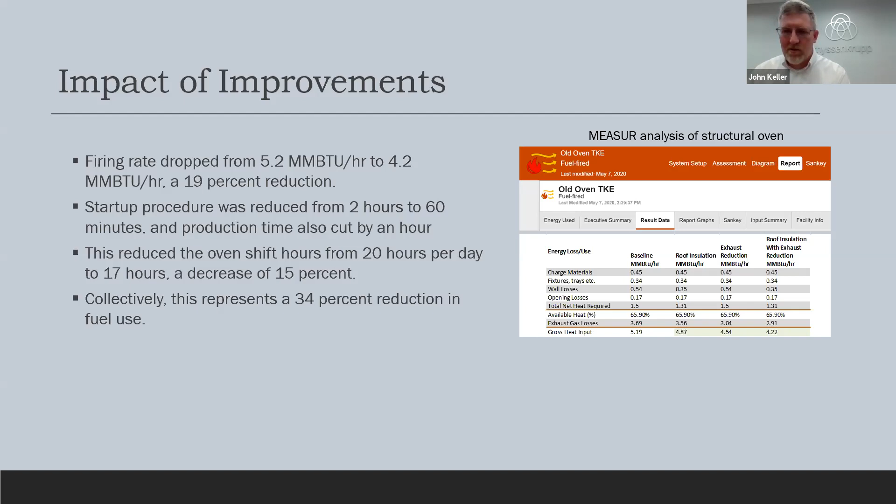John, we're right at the minute mark. Okay. To make sure we're getting a quality cure schedule on our paint, we run a Datapaq through to make sure we're still getting the correct temperatures.

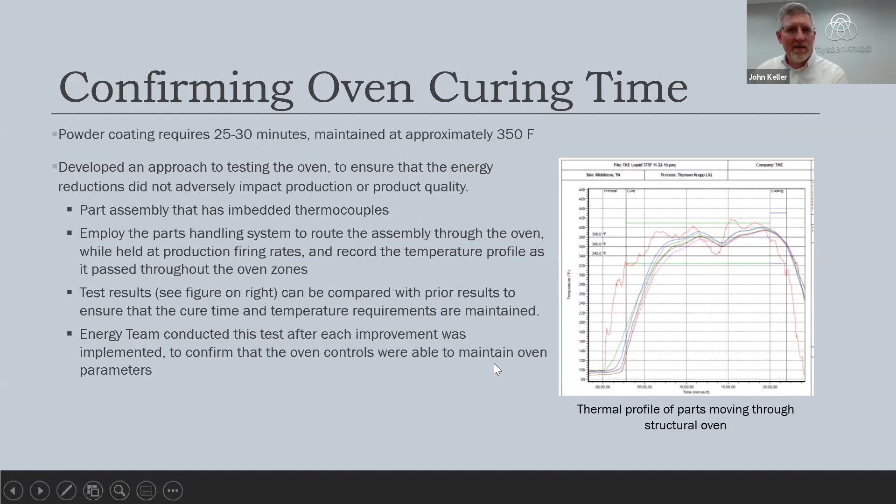So the results were, as mentioned, a 34% reduction in fuel consumption and an annual savings of about $31,000 per year. Right, thank you very much, John.

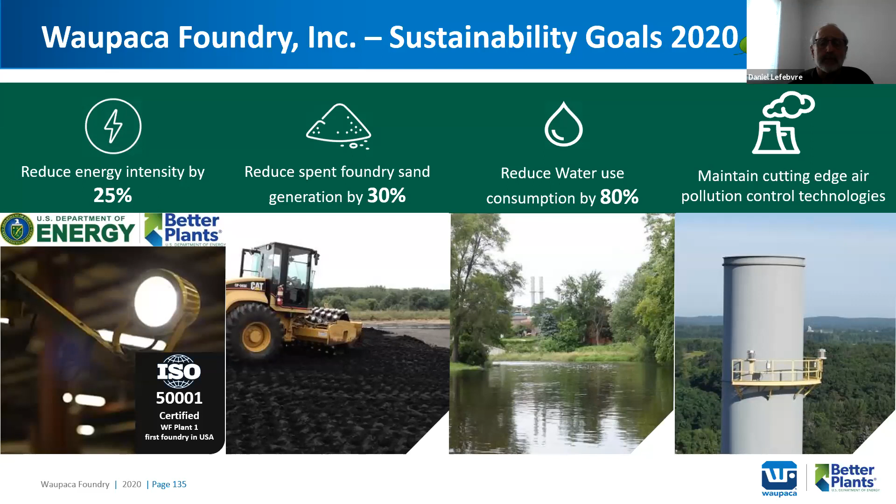Next slide, please. The project we're going to talk about was implemented in our Plant 5 in Tell City, Indiana. That's one of our largest plants in the US, and we produce a lot of brake rotors and different parts for automobile and commercial truck. We employ about 1,000 people there, in a footprint of 560,000 square feet.

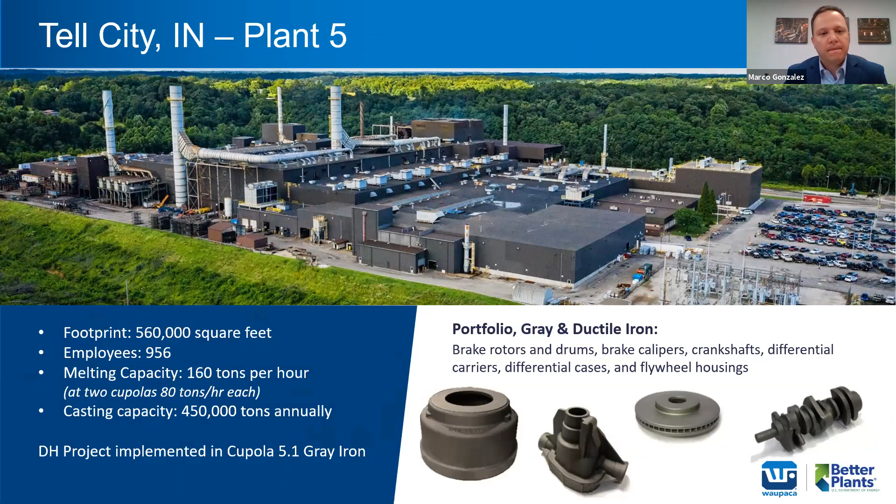Next slide, please. Okay, so let's talk about the melting process. As a metal caster, basically we grab the scrap material and melt it to transform and cast the pieces we're going to sell in the market. Waupaca is considered one of the largest foundries in the world. We have a capacity of 10,000 tons per day we can melt — just to give an example, that's equivalent to the Eiffel Tower, and we can do that in one day. 80% of that volume is melted using cupola furnaces at 7 locations.

A cupola furnace, for those not familiar with the melting process, is basically a vertical steel shell — that's the brown column in the diagram shown — lined with refractory brick. We then build layers of steel scrap material and coke, which is the fuel that provides heat but also provides carbon to the chemistry. The coke consumes air, which is introduced using a blast air fan — we're talking about a volume of 17,000 to 18,000 CFM of air and oxygen injection. That gives us the temperatures we need to melt the iron and also achieve the chemistry we require. That produces a lot of heat and gases, which must be filtered and burned before sending emissions to the environment, so we keep our stack air emissions clean. If you look at the right part of the diagram, besides the brown column, that's all the environmental control.

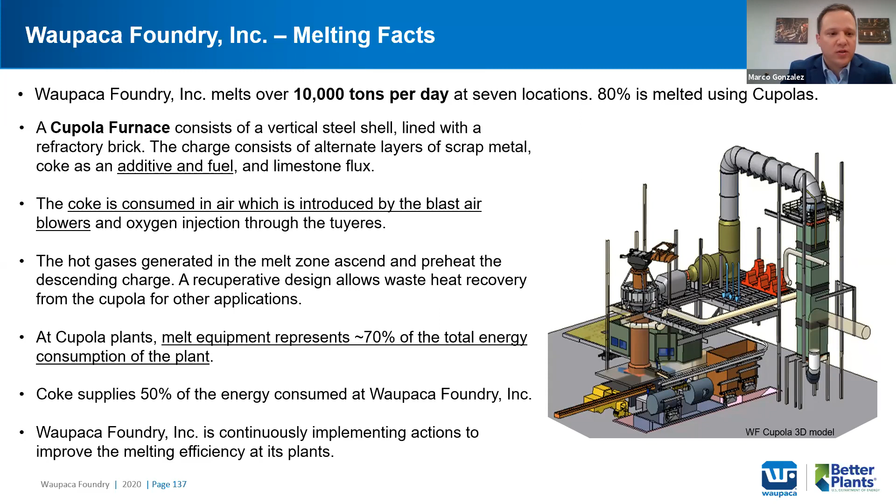The solution was part of a large portfolio to increase our energy efficiency across our cupola processes, focused on installing a dehumidifier. The dehumidifier is a desiccant wheel we implemented in partnership with a cupola manufacturer and a dehumidifier manufacturer, which removes humidity from the blast air we're injecting and provides dry air to the system, so the combustion process increases our melting efficiency.

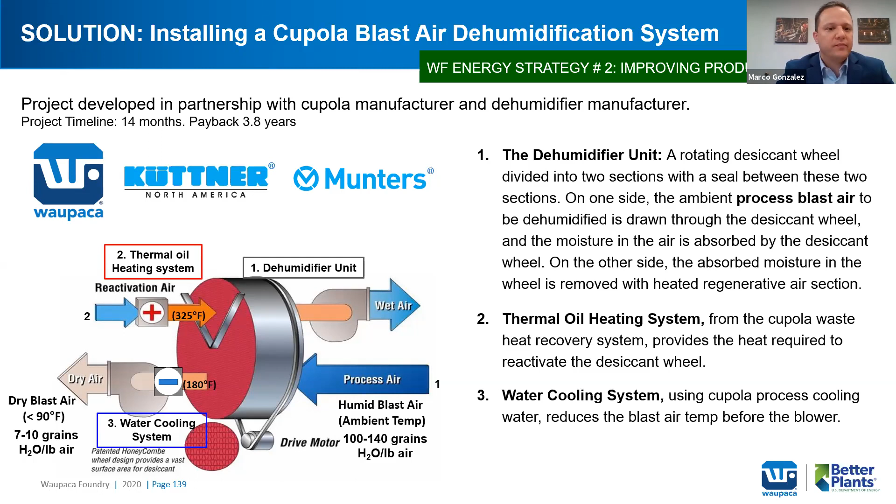Hey Marco, we are just past the 6-minute mark. This is my last one.

To summarize the benefits: there was a 3% cupola melting increase, and now we see uniform performance of the cupola across the whole year. We used to see efficiency drop on very humid summer days, and now the cupola performs in a steady state. That represents about a 2.5% coke reduction in savings, equivalent to about 17,000 MMBTU or $335,000 in savings, which allowed us to reach a payback on the project in about 3.5 to 3.8 years.

To give a reference, the water we've removed from that blast air is about 126,000 gallons, equivalent to about 21 trucks of water. That gives you an idea of how big these savings are, and just removing water from the air has a huge impact for us.